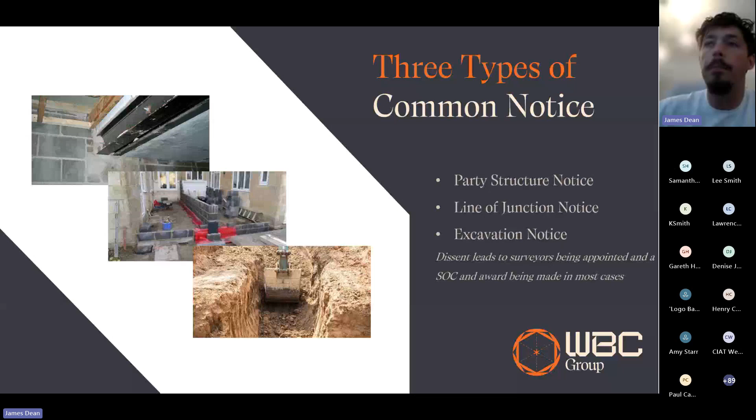And there's a thing called a party fence wall. Now, interestingly, it's nothing to do with an actual fence, but it's a stone or masonry or brick built wall that is sat on the line of junction. So it's got the same rights as a party wall, so people can enclose upon it and raise it and change it and do all those sorts of things. But it's not actually a fence. So it's a bit of wording in the Act which throws some people off sometimes.

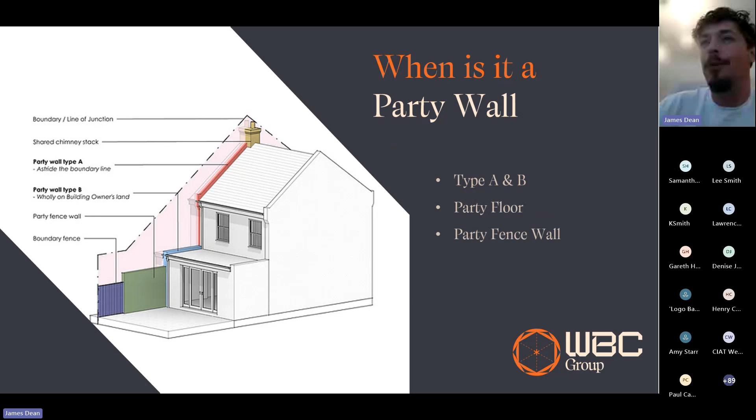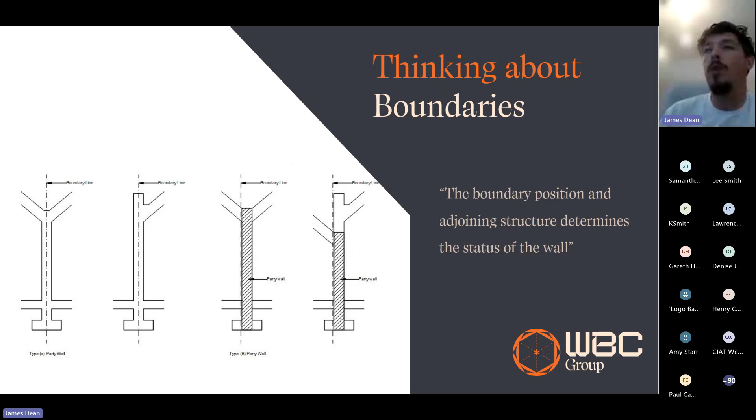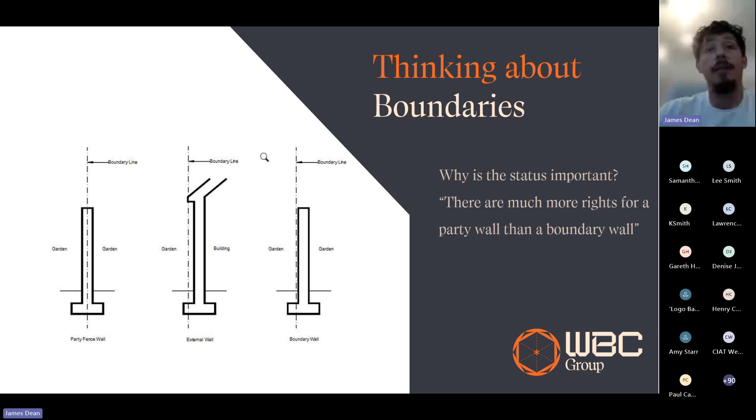Coming on to this, so why is the status of the wall important? Well, actually, as I said before, it's a facilitating act. And actually, if you determine that it is a party wall, there are lots of things that you can do to that wall and lots of rights that you can get. And that informs our design decisions going forward.

And it's interesting because quite often I hear that my designer has said, pull it away from the boundary so that there's not an issue. In fact, I heard that just yesterday when I was on a call with a potential adjoining owner. And actually, that's quite bad advice, because Section 8 within the Act allows access to build. And it's one of the only pieces of legislation that allows access to build a new build or extension, whatever, and actually access the neighbour's land. And it's quite powerful in that regard.

So sometimes actually placing the wall on the boundary is the right thing to do, because it will give your client potentially access to come in and build. And if you are going to do that, you do need to think about trespassing. You do need to think about gutters and things like that, and how it's detailed so it doesn't cause a trespass on the boundary there. So the first big tip of the day really is just thinking about the positioning of it.

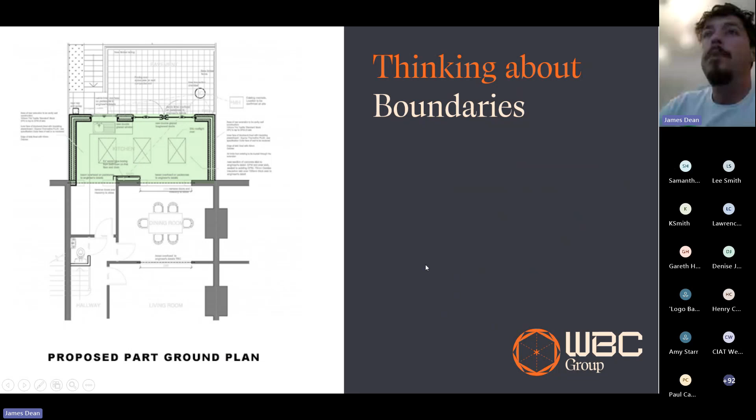In terms of boundaries, how do we know where it is? Well, the first thing to say is party wall surveyors can't settle a boundary dispute. So if the neighbours are in dispute, we're not allowed to settle that. What I will say is try to get your clients to avoid boundary disputes. They're expensive, they're not good for people's health, they're stressful, and nothing really good comes from them, other than solicitors make a lot of fees from them. So yeah, try to avoid them.

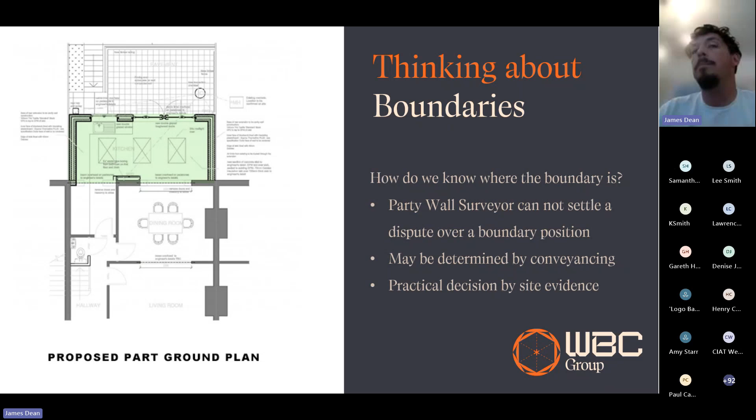Sometimes within the deeds, you can see that something is a boundary wall or is a party wall, or someone has responsibility for it, so that can be useful, but quite often they're silent. And most of the time it's a practical decision that the surveyor takes, that we believe for the purpose of this award the boundary is in this sort of position. So how do we look at that? Well, we can look at the site evidence, so we can look at parapets, we can look at the exterior features like headers and things like that, and see where it is.

Also, if we can get access to the neighbour's property, we can measure and figure out how thick the separating wall is between properties, and then we can run that line outwards, and it gives us a starting point for where we think that boundary might start, and it helps to add that evidence. I always say when you're on site, take as many photographs of the property that you're working on, but also the neighbouring property as much as possible, including adjacent heights if you can, because you can always refer back to that later if you're a bit unsure when you're doing your design about where the boundary might be.

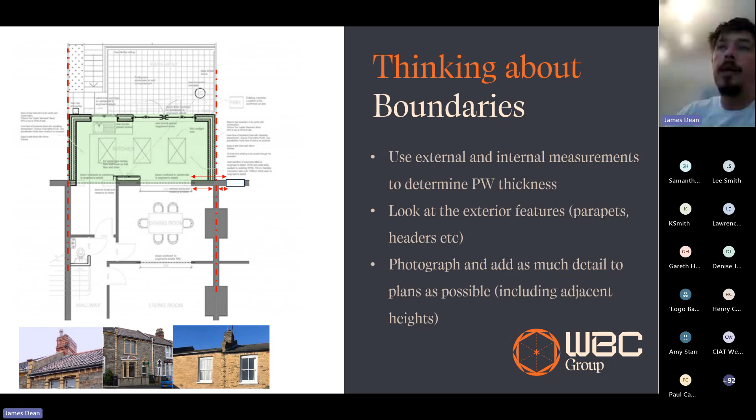And I would always encourage people, if they think they know where the boundary is, to try to show that on the plan, because it helps to clarify things for the neighbour, but also for any surveyors that might get involved later, where you were thinking the boundary was.

Talking about sort of when it goes a bit wrong. So I received these plans a couple of weeks ago from a building owner who said, can I have a look at it and give them some advice on the party wall and act as surveyor for them? And this isn't by any means isolated. This happens all the time.

So I've received these plans, and I can see there's a little bit of detail on the side of the neighbours for the existing on both elevations, and I can see that probably there's a bit of a step there, because we can see the roof raised and we can see the ground sort of a bit lower on the left-hand side. I also looked on Google at the site, and I could see from the front of the property, actually, yes, it's on quite a slope. So I'm expecting there to be some detailing.

Actually, what I received was this, the technical drawings showing it right up to the boundary line. And interestingly, it's not taken into account that when I went to site, there's a 1.5 metre retaining wall to the right-hand side. So they clearly haven't really looked into very much detail with what was happening at the boundary. Doesn't account for damp proofing, doesn't account for structurally how that's not going to undermine that existing wall when we have to put this new wall in. So lots of things missing from it.

And also on the left-hand side there's a raising of the party wall, which is not accounted for either. There's no drawings. There's this typical section. Well, this typical section is okay for perhaps the front of the building, but absolutely useless for the party wall surveyors. So if you are doing projects like this that will need party wall, I would say it's really, really important to actually draw those details, draw the details of how it connects both sides, how it's being raised, because if you don't do it now and it goes through for a party wall dispute, you'll certainly be asked to provide it later. And also, it sets the wrong tone.

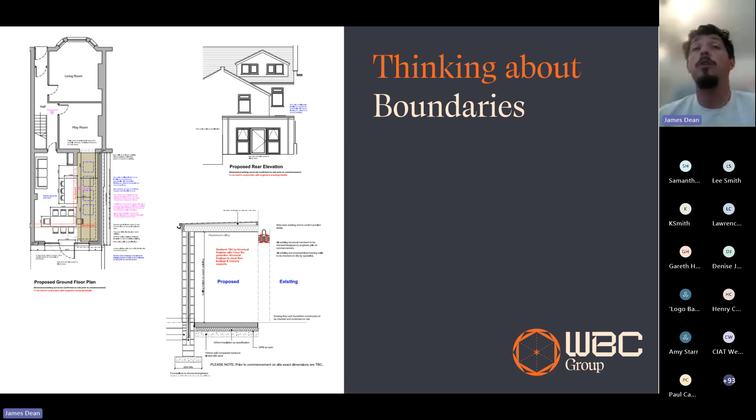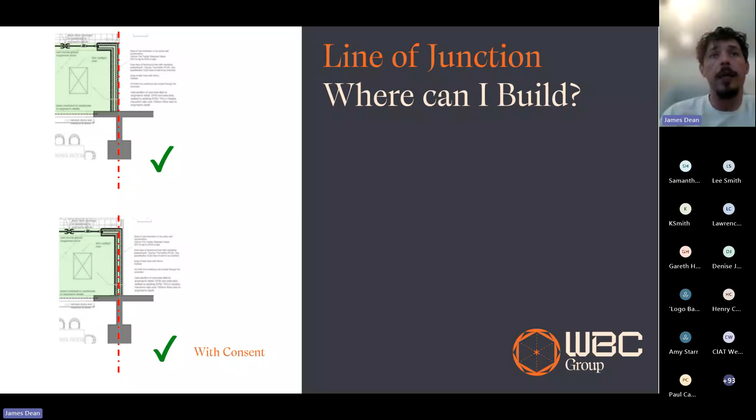It's really good to just be thinking about those boundaries. So the line of junction, where can we build? Where can we design it to? So there's 2 common things that we can do. We can build right up to the boundary line with a line of junction notice. We can also ask to straddle the boundary, and that has to have the express consent of the neighbour.

Now, why would the neighbour give consent to that? Well, they can potentially use that wall in the future to build from. It avoids having a weird little gap when they try to build an extension in the future, which can get damp. And also it allows maintenance to the side of that wall. So if they've got render or something, it doesn't become unsightly in the future. So there's a few good reasons why they might give access there to do that and to build it as a party wall rather than a boundary wall.

So just looking at, again, express consent, one of these details that comes up and something to be thinking about is if you have a party fence wall, that wall that I said earlier, a bit like the one in the picture at the top there, which is not a party wall, but it's got the same rights as a party wall, you can replace that wall potentially under a party structure notice without having a line of junction notice. However, if that wall isn't long enough, you may need to extend it further, and if you do not get express consent for that extra piece of wall, you may have to have a dog leg in the building that you're designing, so it would end up looking in plan something like we have there in that diagram.

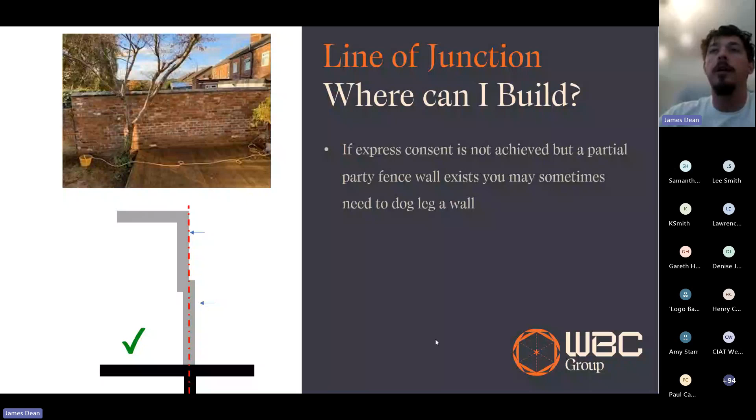Excavation. So when are excavations notifiable? So there's 2 types of notices under excavation. There's a 3 metre and a 6 metre notice. The 3 metre notice only comes into play where you're going deeper than the neighbour's footing, and you're within 3 metres. Standard sort of type footings, strip footings or mass fill footings.

Interestingly, most properties in this country, sort of pre-late 70s, won't tend to have foundations that are as deep as we put in today. So if you are building next to a property that is older than kind of the late 70s, which most of our building stock is, then you are likely to need to have a 3 metre notice if you're within 3 metres.

Interestingly, this talks about excavation and structure. Now, you have to be careful with this because there are things that haven't necessarily gone through case law at the moment, but are being pushed by barristers in the party wall world, where they are trying to consider other things such as a simple pathway as a structure. I'm not sure I necessarily agree with that from my professional point of view, but that is sometimes where it's going. So whilst the diagrams that the government issue always focus around buildings and footings, actually it could apply to other things.

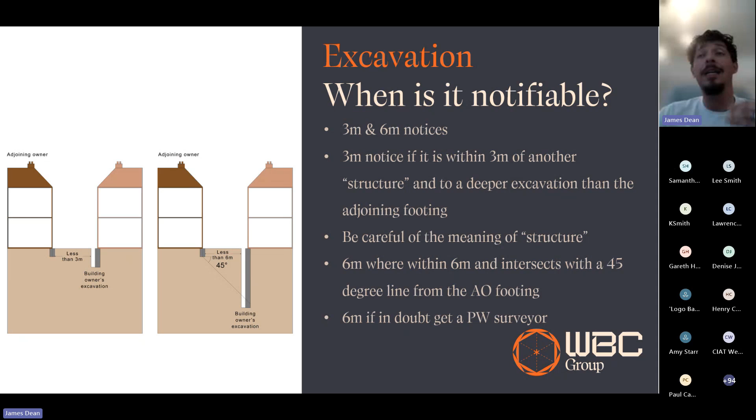So what I would say with any of these, it's the one that catches people out the most, the excavation notice, because sometimes it's quite clear that a party structure notice or a line of junction notice isn't needed, but it's not always clear about the excavation notice. So do just be careful if you're advising clients whether you think they need it or not. More often than not, if you are in close proximity, it will come into play. And if you're unsure, speak to a party wall surveyor.

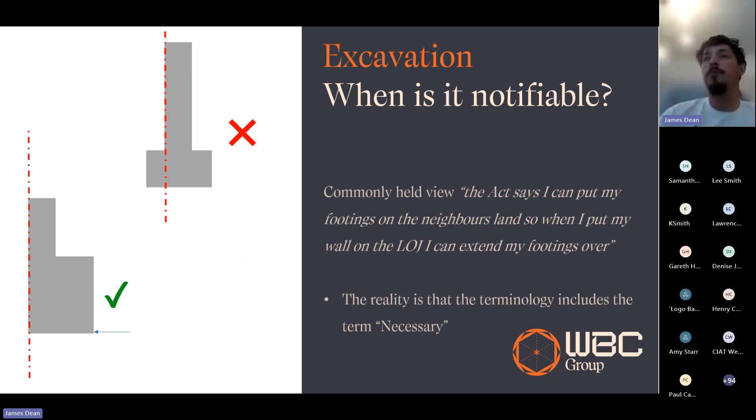So there is a part in the Act, and a commonly held view is that the Act says I can put my footings on the neighbour's land. So when I put my wall on the line of junction, I can extend my footings over onto the neighbour's land. Well, that is in there, and I think that's probably what it was meant for in the Act.

The problem is there was a piece of terminology that said where necessary, and through case law and practice, it's now considered not necessary in most instances to put a footing on someone else's land, because you can do an asymmetrically loaded footing, as we've got here. This is in section, which essentially, NHBC has a standard for this as well, allows you to build right on the edge of the toe of the footing, without encroaching onto the neighbour's land. So it's necessary perhaps only in very few cases.

The other thing I would say here as a pertinent point is, if you are designing anything that you think needs to go over, if you have any steelwork inside of that footing, rebar or whatever, it becomes a special foundation, and you cannot put that on without express consent of the neighbour. So again, looking at where that might happen, typical basement conversions and things like that, where you've got to dig down, just be very careful when you're organising with the engineer about how that's going to work.

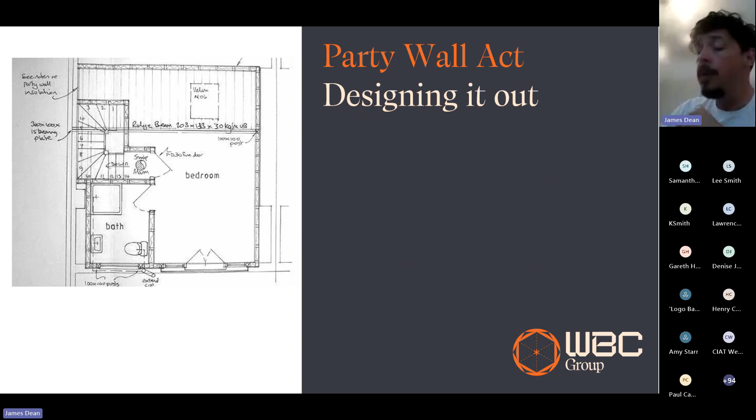So let's talk about designing it out. So there is case law which says actually it's okay to design the Party Wall Act out. There was a case where essentially the adjoining owner was saying, well, they've just designed it in that way to get around the Act, and it's a bit of a folly.

And the judge said, well, yes, but if it's designed in that way, if it doesn't come into play, it doesn't come into play. So it is okay to design it out, but what I would say is be really, really careful if you're doing that, because there's lots of things that can trip people up in the nuances of it. So always consult with a party wall surveyor if that's what you're trying to do, and get them in for an hour or so just to consult and give you some advice on the technicalities of it.

So to give you an example here, this is a loft conversion. You've got a ridge beam running in that we can see there, and typically this would be pocketed into the party wall and would require party structure notice. You might decide that the neighbour is so difficult and so aggressive and so hard to deal with that you were going to not have it doing that, because it's just going to be more hassle than it's worth.

So what you could do in theory is you could have a beam in the floor, which goes out to the outer wall and to a spine wall. And then you place a post between the two to carry the end of that beam rather than pocketing it out. And if none of this is fixed back to the party wall, that doesn't require party wall consent. So it's a way of designing it out. But I would say always consult with a party wall surveyor if you are trying to do that.

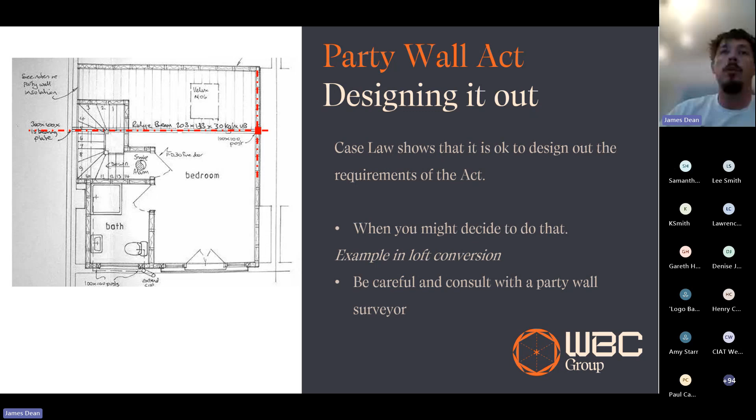Thinking about personalities. Now, I think one of the biggest things with anything in life, I suppose, but more often with party walls, is that a lot of what happens comes down to the individuals involved, and that's not just the building owner and the adjoining owner, it's also the surveyors involved. So thinking long and hard about those people that are involved and who you suggest to do these things.

So surveyors typically, there's sort of personalities. You get people that are very technically driven, very detail focused. It's quite a common personality trait. You do get the pragmatic surveyors, which perhaps have a little bit more on-site experience, that look at pragmatism and moving things on. You get some which are bad. In all honesty, in my 18 years, I have come across a few of them.

Perhaps the ones I always think raise alarm bells are what we call the ambulance chaser ones, which send letters from planning permission to neighbours, riling them up, saying make sure you've served notice and all these kind of things. So you do get those types of characters, and you also get what I call the rock star surveyors who are so involved with the legal aspect of it, they're almost quasi solicitors. They usually charge a very high fee.